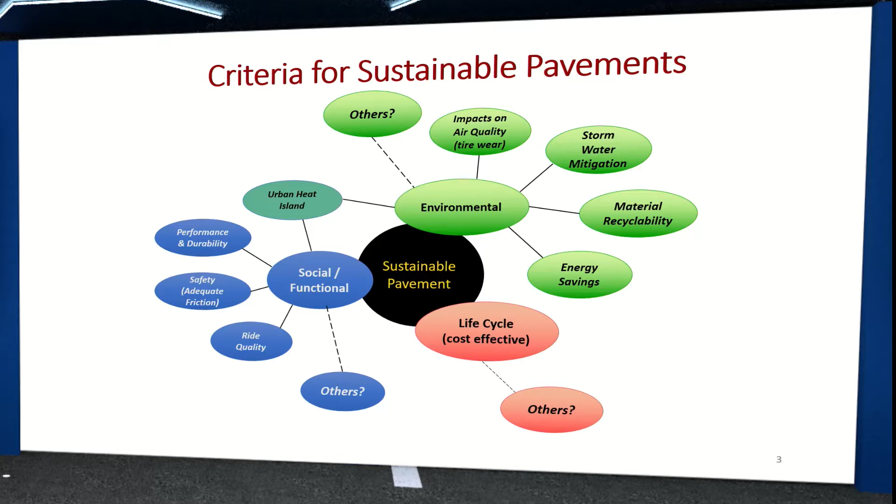We have been studying ways of improving wet method asphalt rubber applications, and we have developed RARx to make roads far more sustainable and far more cost effective, with huge benefits for the users. We have been very conscious in developing sustainable pavements, as all others define them, with great environmental impacts, with great life cycle cost benefits, and with good social and functional properties, namely ride quality, friction and safety.

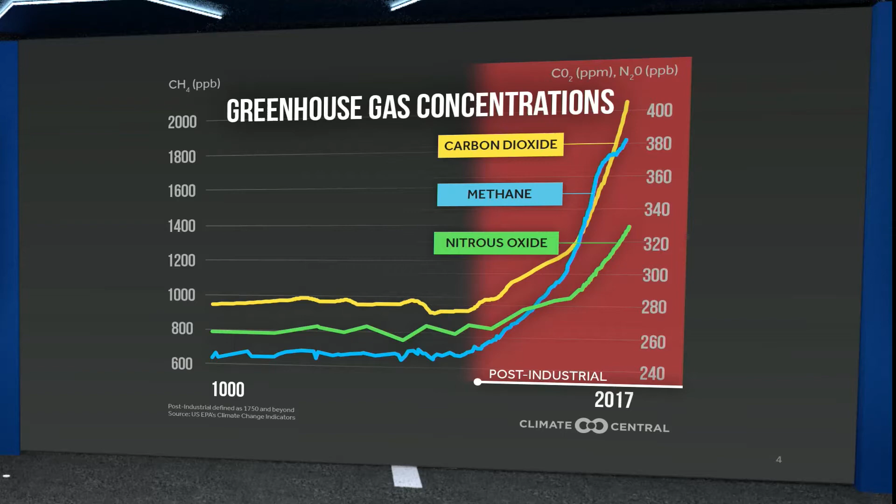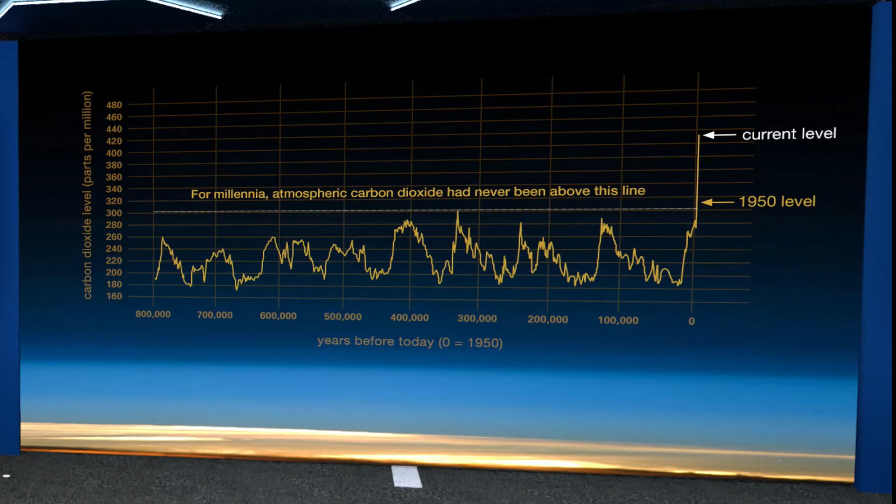This has been achieved in the midst of a reality that we all face, that due to our actions, the greenhouse gas concentrations have been exponentially growing in the post-industrial era. It is that makes us realize that we are in a path that is not sustainable. We are currently at CO2 emissions today that have not existed in the world for at least about 1 million years. We need to control that.

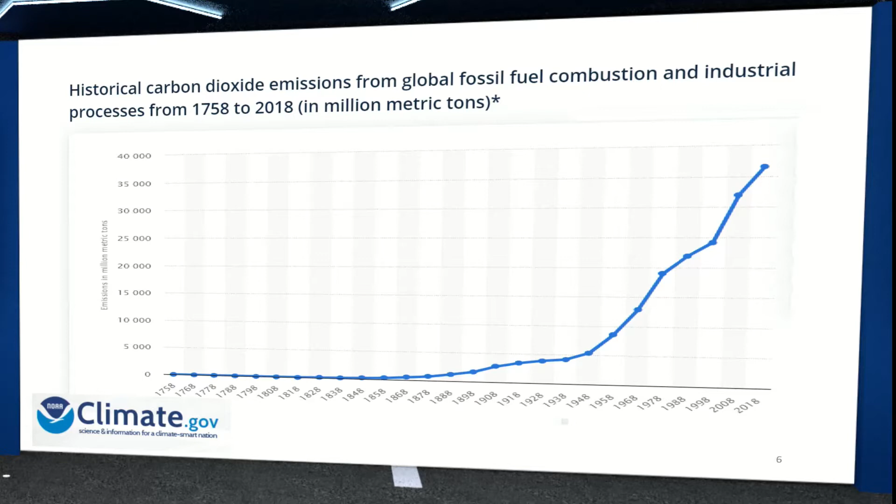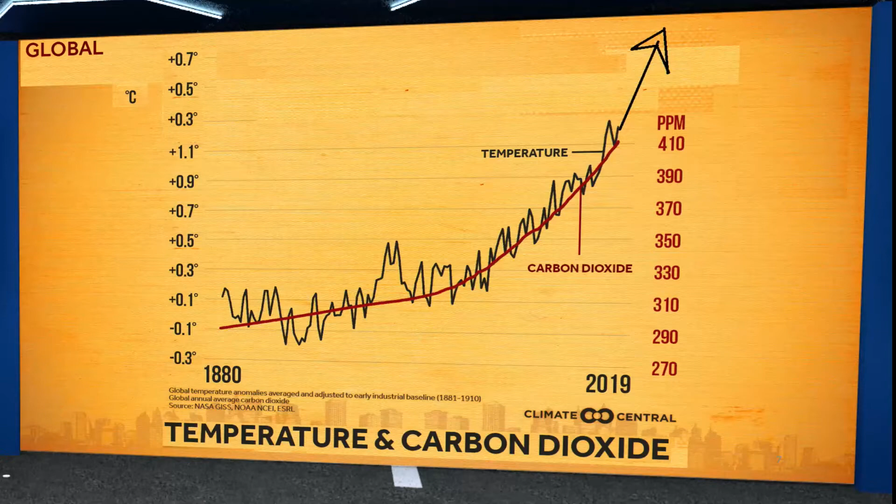We need to realize that these emissions caused by fossil fuel combustion have been exponentially increasing since the time of the post-industrial revolution. We need to control that, because otherwise the temperature in this planet is rising at alarming rates.

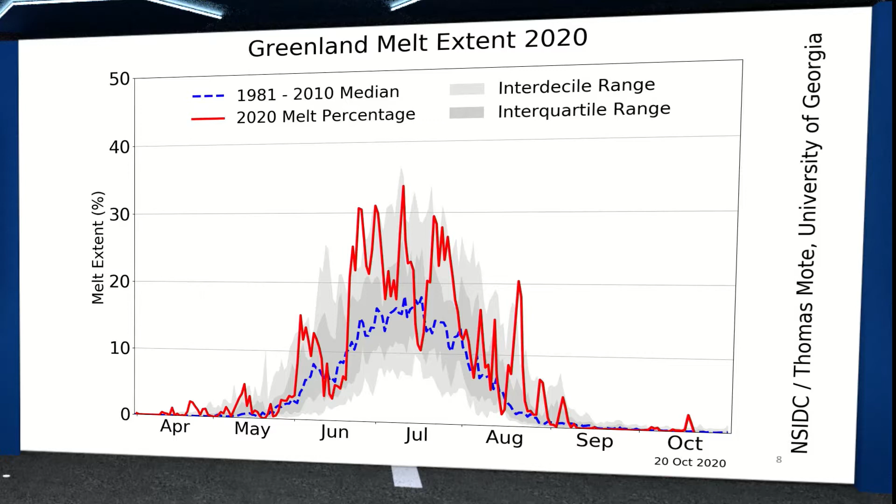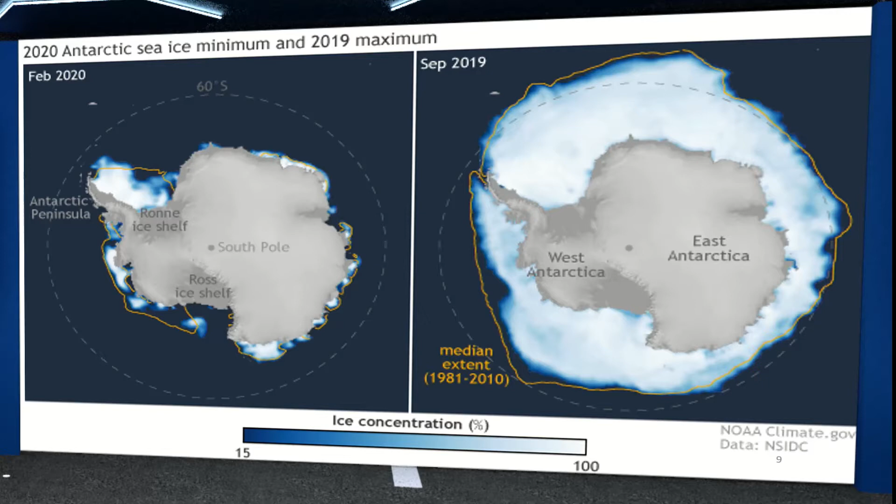We know that this is not going to stop, and the consequences of this global warming are many. One, for instance, is that probably Greenland will melt if we don't do anything. And besides that, we have Antarctica also melting. And this will cause high sea level rises.

This has been widely documented. You may hear that it's controversial, that Antarctica is losing in some parts, gaining in others, but it's clear that the net loss of Antarctica is growing as climate change is progressing.

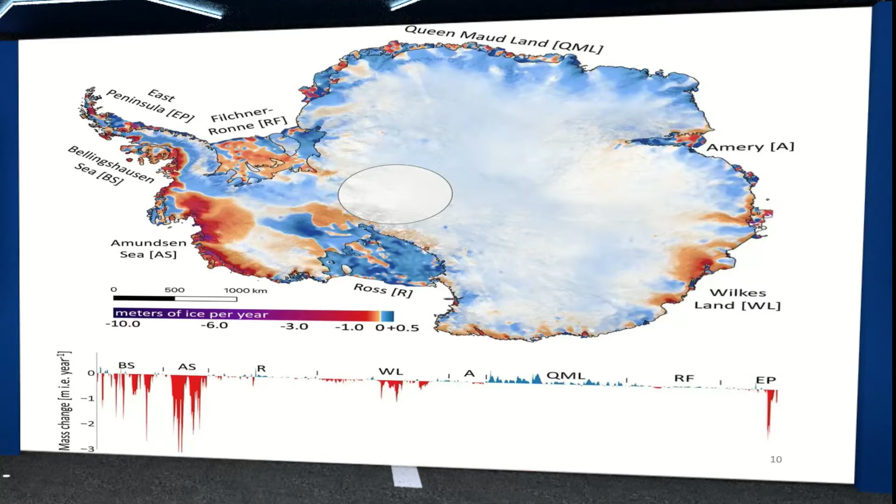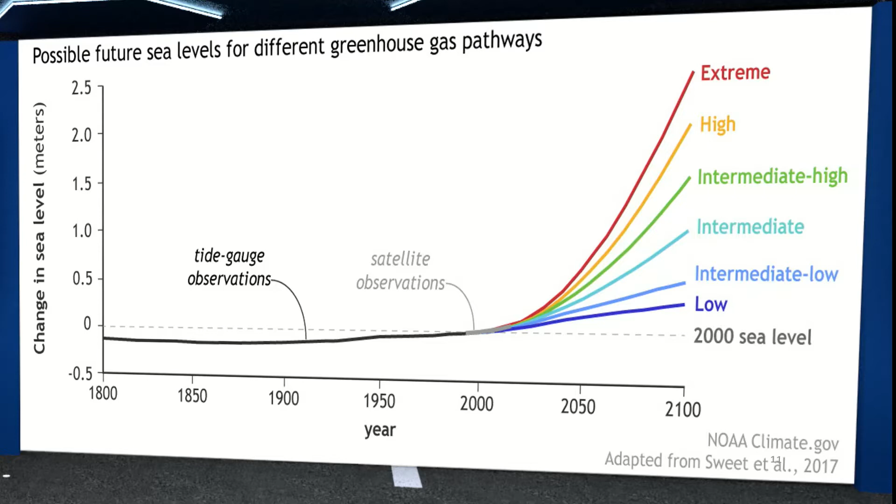We need to control that because the latest prediction indicates that we are now on a path that we will have extreme, too high levels of sea level change. So by the time our kids are in control of the world, we're going to have a planet where the ocean levels are about 1 meter higher than they were in our time, or the time of our fathers. This has caused profound effects.

For instance, in the US, property near the coast in Florida is now starting to lower in value because they know that they're going to lose the houses. We need to realize that this is a global trend and has been predicted. And far more, the predictions have been corrected up to now.

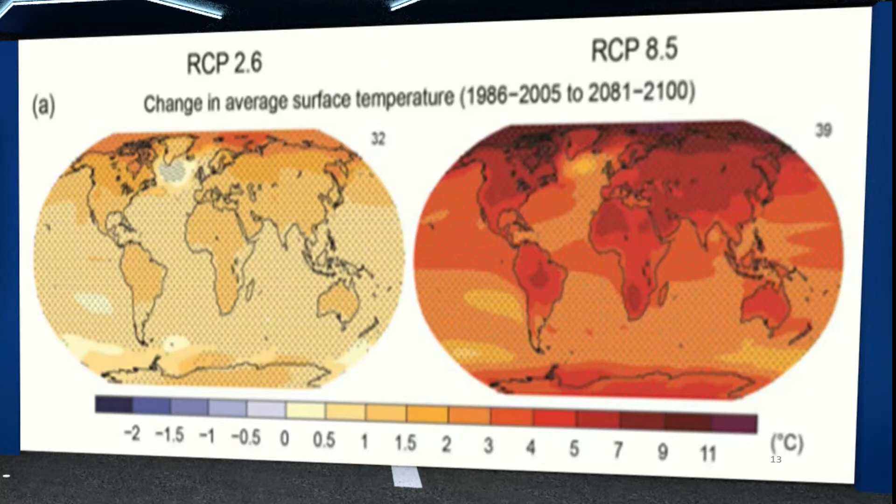You can see in Mexico that you're going to have 6 to 7 degrees on average more. And you can see many parts of the world going to be tremendously impacted. And you can see that this is already happening. You can see that since 2012 to 2016, we have seen temperatures rising on the order of 2 degrees.

And I want to point out that the Amazon is going to be so hot that it's very likely to become much drier, and with that, we're going to lose the forest.

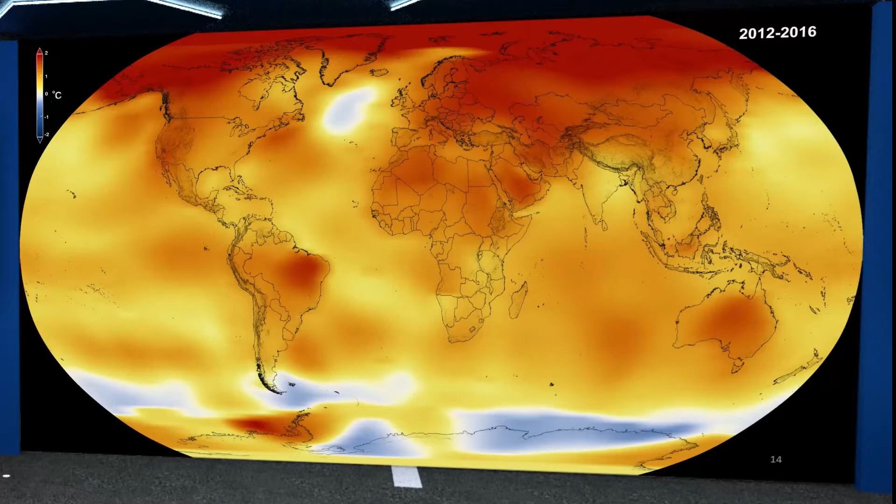This is also evident by this graph showing the level of change in rain seasons. You see Europe is going to be very dry, and so is Australia. So is the Amazon, and you can see Mexico is going to be strongly affected. You're going to have less rainfall and a strong influence on the plants you're going to be growing.

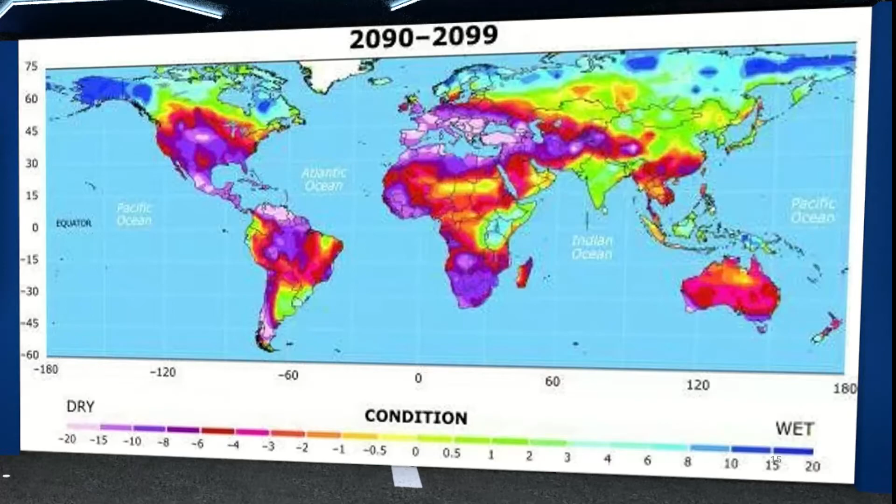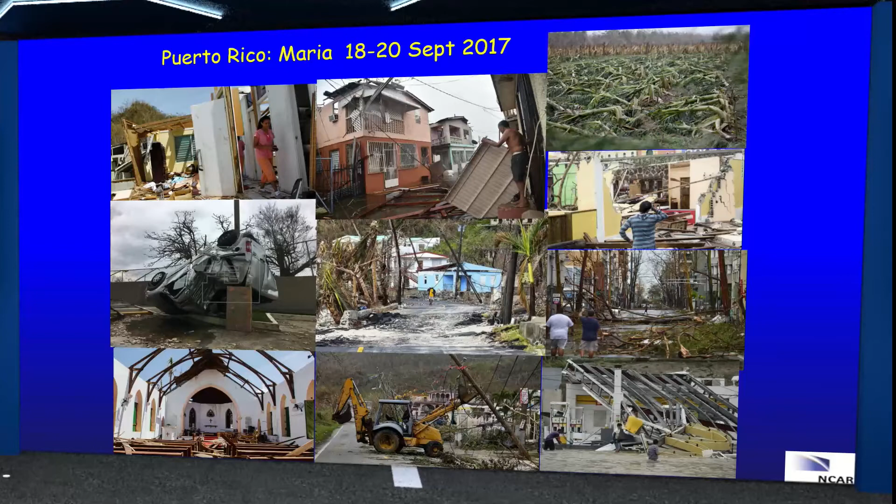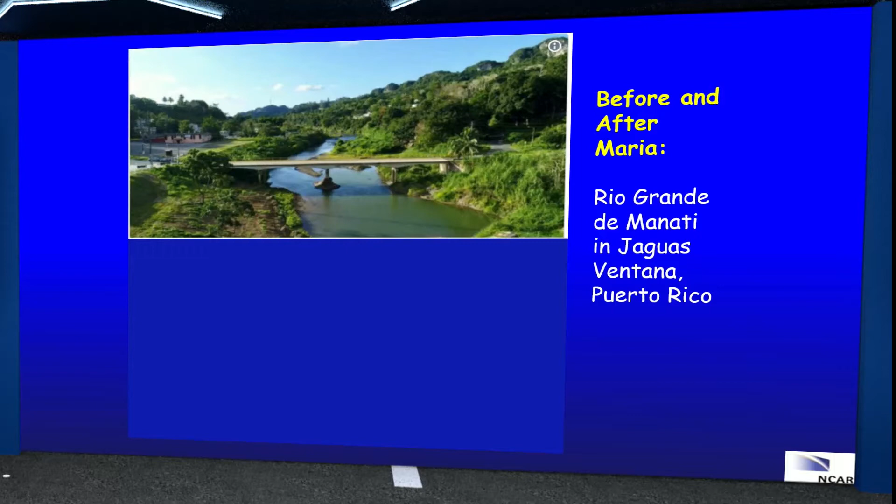Another example of the global destruction occurring is Puerto Rico, Hurricane Maria in 2017. The devastation was great, and you can see this very nice bridge was totally destroyed. If that bridge was done with asphalt, with warm mix, do you think we would have saved anything?

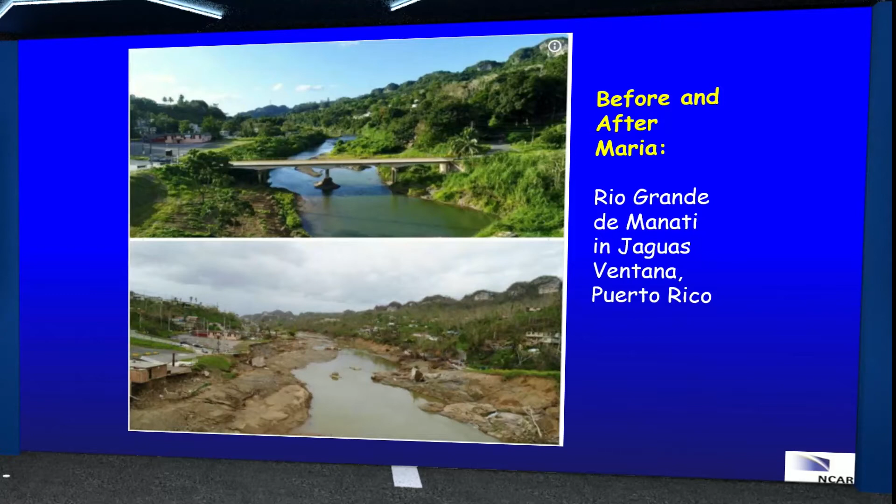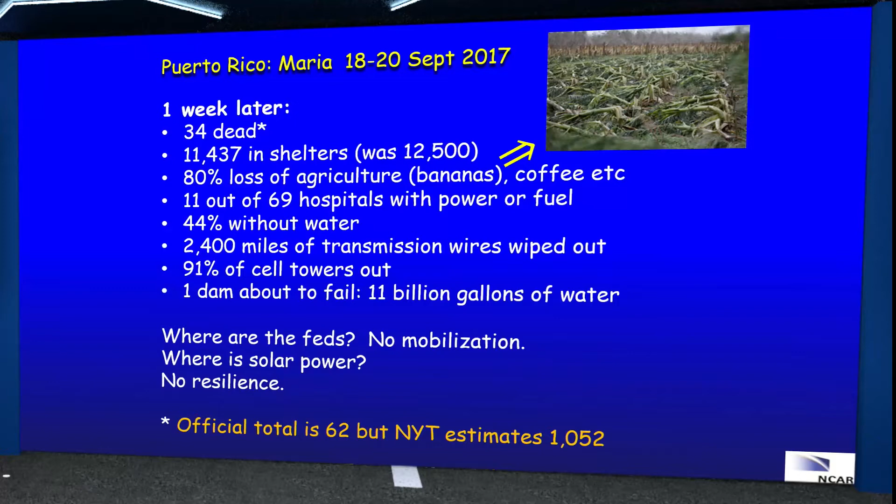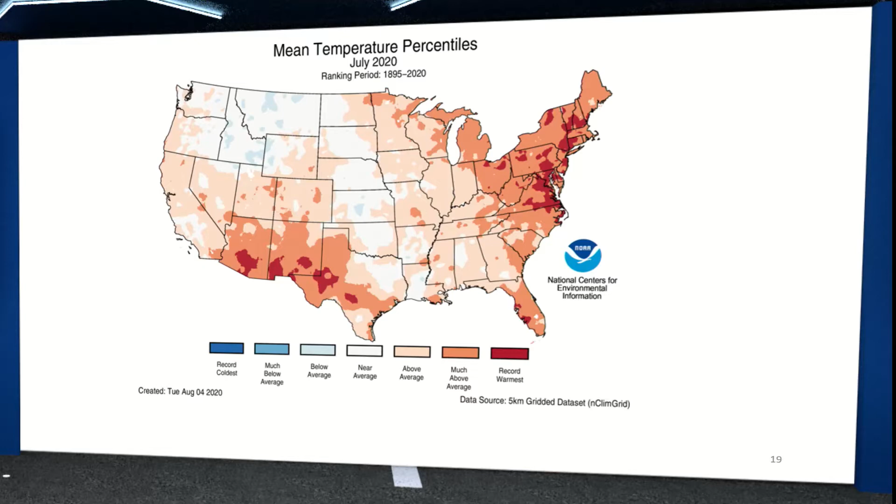With mean temperatures increasing, we had records this year in July 2020, and we have record droughts in the US. This is happening now. The consequences are to be paid now and more in years to come.

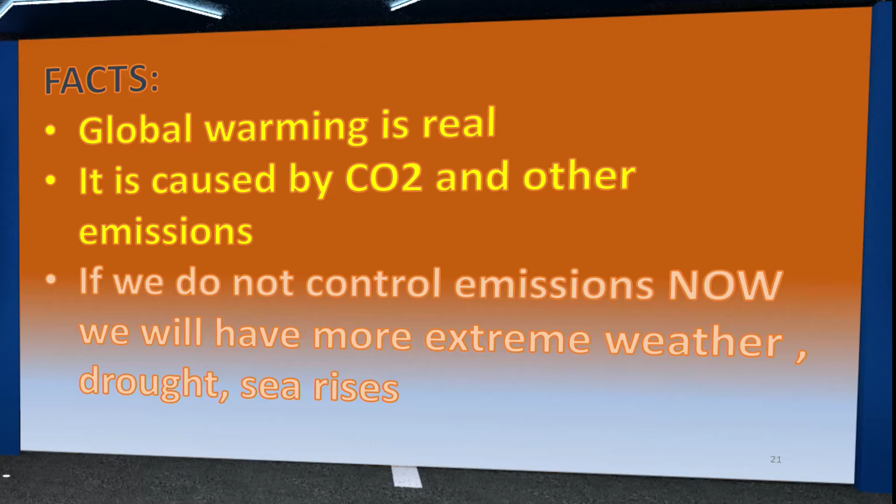Global warming is real. It's caused by CO2 and other emissions. There's nothing to be disputed here. If we don't control emissions now, we will have more extreme weather, drought, and sea level rises. This is a fact, this is not politics, this is not imagination. This is as clear as day and night. So what we have to do is stop and minimize CO2 emissions and others.

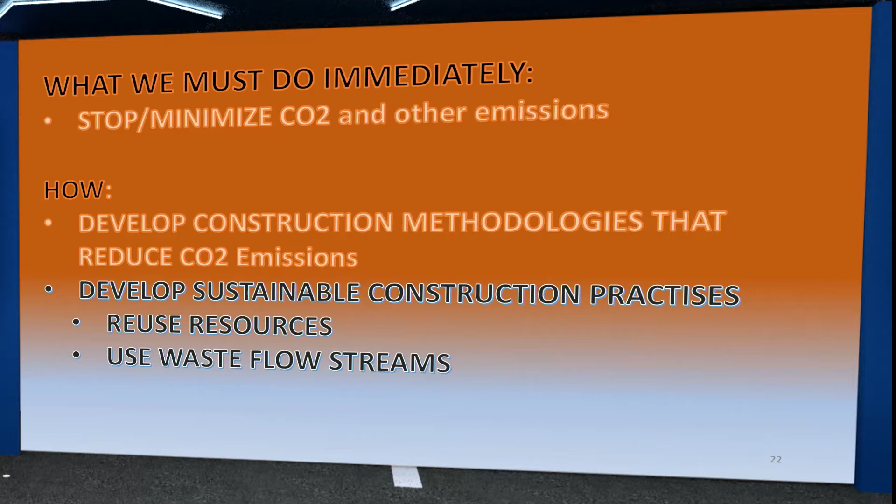We must develop construction methodologies that reduce CO2 emissions, and we have to develop sustainable construction practices, reuse resources, and use waste flow streams. This is not something we have an option about. If we don't do this, the planet will be strongly affected.

This is so important that for the first time, a president -- he may become president by the time you listen to this presentation -- said that we should transition out of the oil industry. It has to be replaced, because if we don't replace oil emissions, we're going to leave this planet in a very bad shape.

So we have to do global warming versus sustainability evaluations. We have to face the reality, we cannot ignore it. Burning fossil fuels is the elephant in the room. It's not tremendously effective if we're just considering the little mouse problem of a little recycling and a little reuse. Either we do it on a big scale, or we're going to suffer dire consequences.

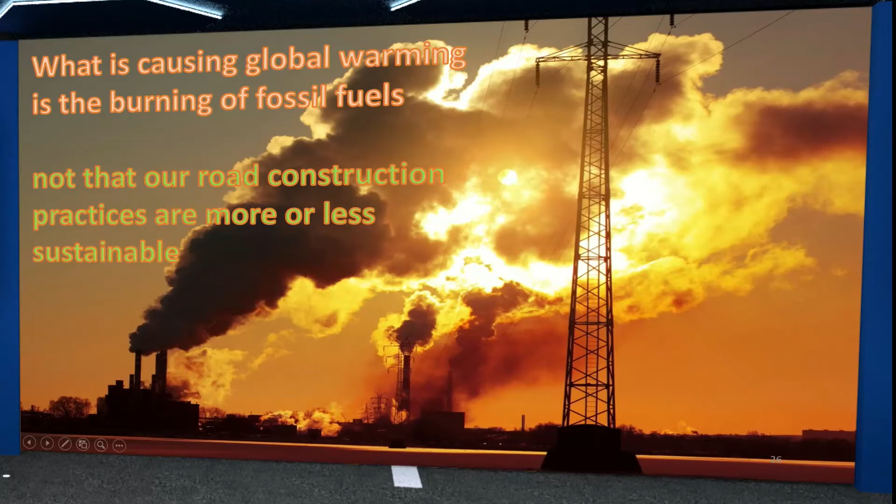So we are burning fossil fuels, and we must stop it. The causes of climate change are not consequences of our direct construction practices -- they are a cause of burning fossil fuels. So if we do the same thing, or better, without burning fossil fuels, we are a winner.

So we have to change. We have to move away from using oil and toward using renewable energy. And with that, I have to tell you something. Right now I'm making this presentation sitting in my office at Consulpav, and I just recently placed solar panels that are now feeding my electrical car, and all the electricity we consume during the day at Consulpav comes from solar panels.

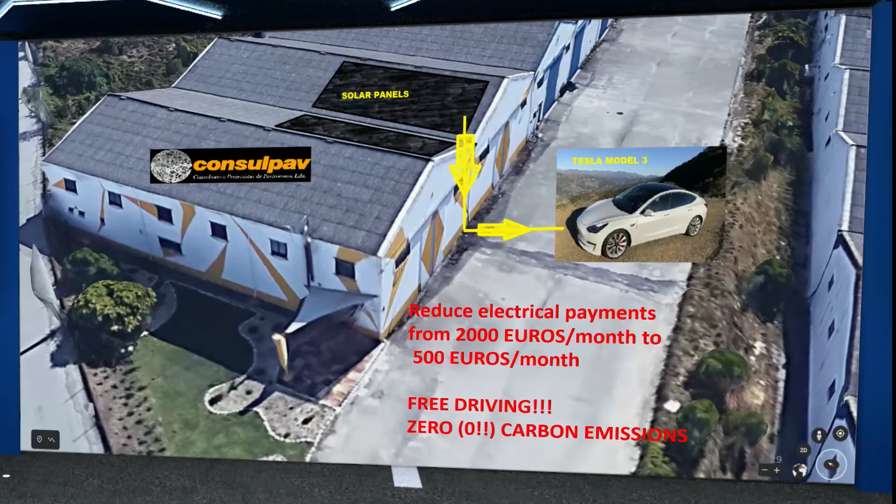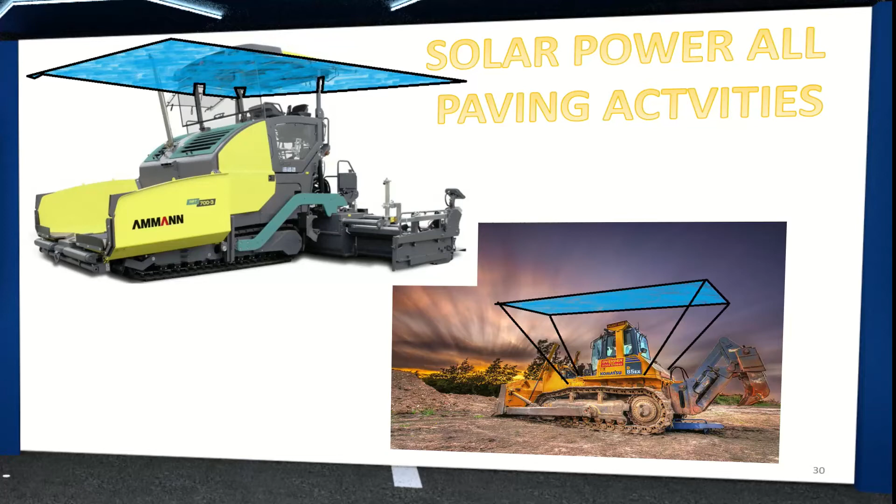So let's think, for the sake of it, about a way of making solar power pavers, solar power earth moving equipment, and solar power plants. So there it is: right there we have become free of oil dependency.

We have unlimited energy, and we create sustainable pavements. But we can go further. We can use the technologies we have to benefit pavements.

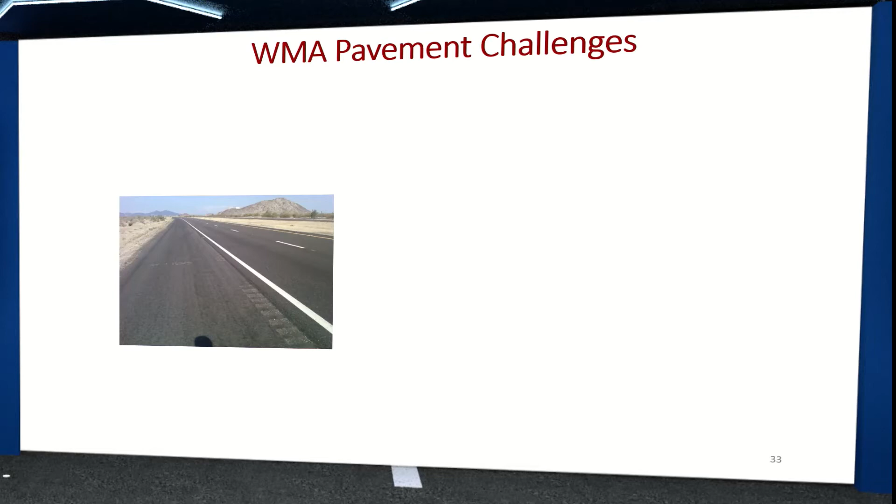Now, many in the US are still forgetting the big picture, considering warm mix technologies and using this technology as a solution for global warming. But we know that warm mix has some problems and it really is not tremendously effective.

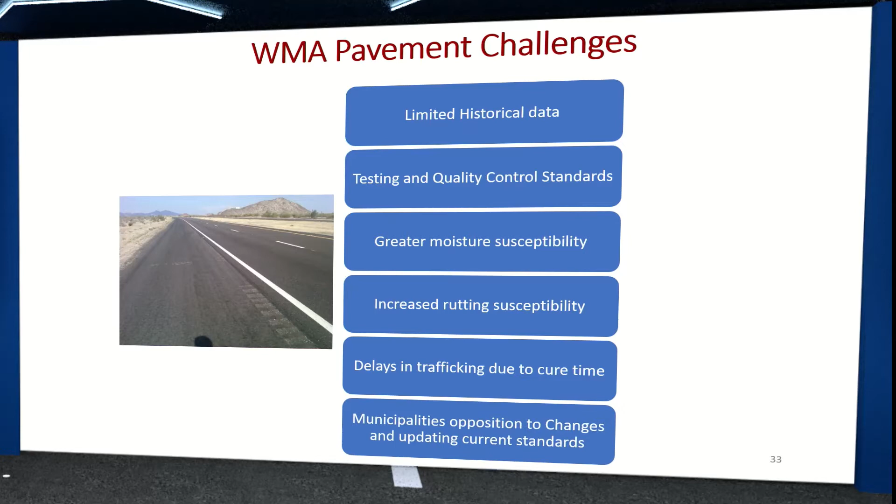So we need to think further. We obviously need to recycle pavements. We need to use as much recycled material as possible. And this is for sure an area where we need to improve testing and quality control standards, because the mixes are to be tested, the materials are to be tested with these new materials.

But now the benefit of it is that we have performance-based specifications. We have performance-based tests. Presumably, we are supposed to make mixes, test those mixes, and understand how they're going to perform in the field. So let's use the materials, see how they perform, and use those that perform well.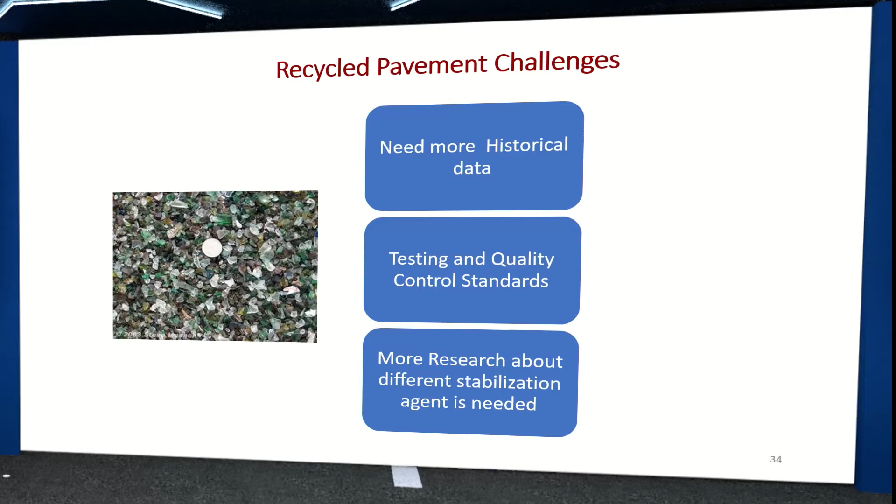Now, as we wait for all these performance evaluations, we have a technology we can use today that has been demonstrated over the last 50 years to be excellent. Asphalt rubber is very strong as a sustainable solution. We have, as you can see, many documented benefits of using asphalt rubber.

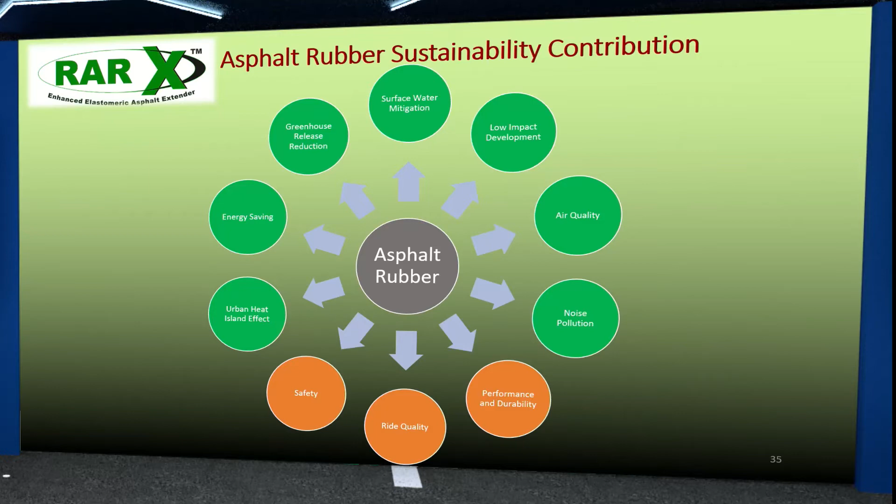It's not a new thing, it's not an invention, it is a fact. It's been very well documented, to the point that in California, all the surface mixes pretty much only use asphalt rubber. So if they benefit, we can too.

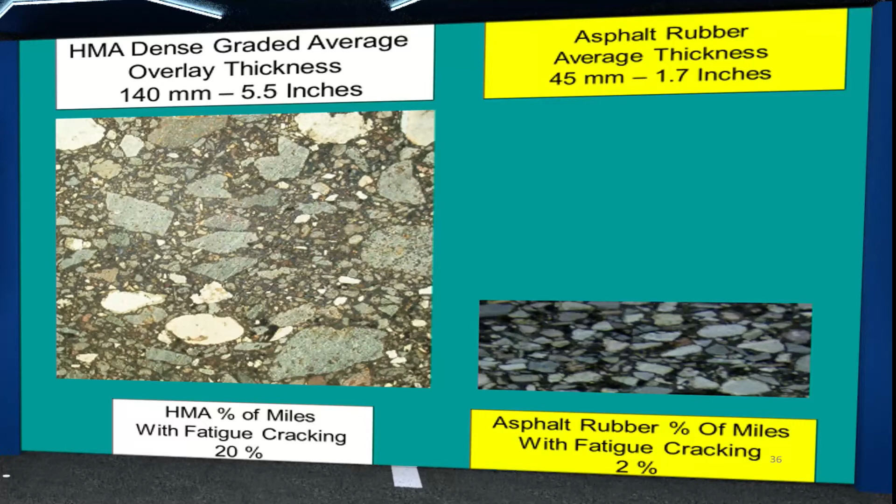In Arizona, they have demonstrated that instead of using 140 millimeter thickness layers, it's equivalent to using 45 millimeter thick layers with asphalt rubber. How much CO2 are we saving by using one technology versus the other? And this is proven - you don't risk anything by adopting these technologies now. No risk. It's risk-free, it's just benefits.

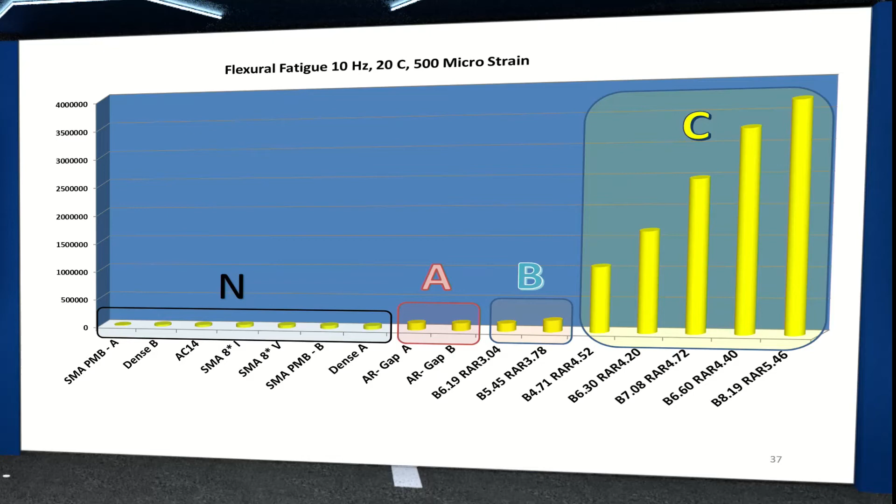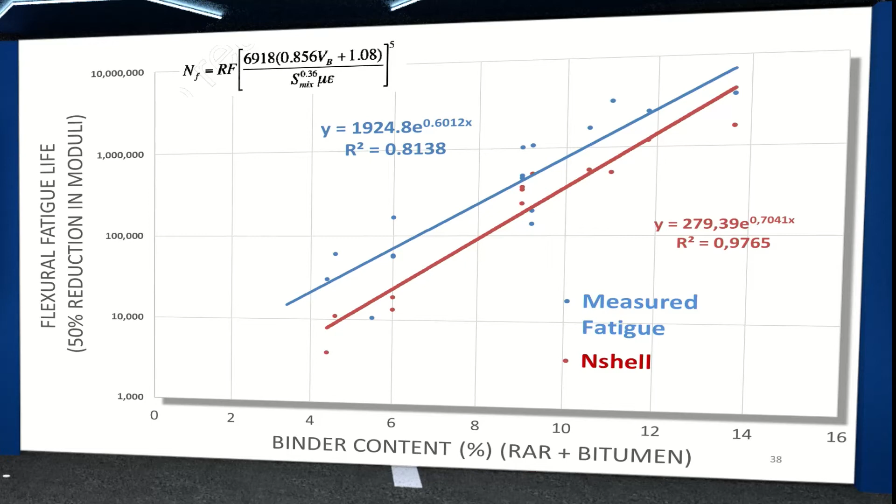So it's clear that the more you put, the better performance you have, and you see that the benefit is exponential. So a little more gives you much better fatigue life. So let's take advantage of it, knowing that the performances are a little shy, they are conservative, and that the fatigue life with RARx and binder together matches perfectly the predictions done using the Shell method.

Pretty much indicating - and this is the amazing part - is that by placing rubber in the pavements, they perform like bitumen. So the mix of bitumen plus rubber plus RARx actually just behaves as bitumen from the point of view of resisting fatigue.

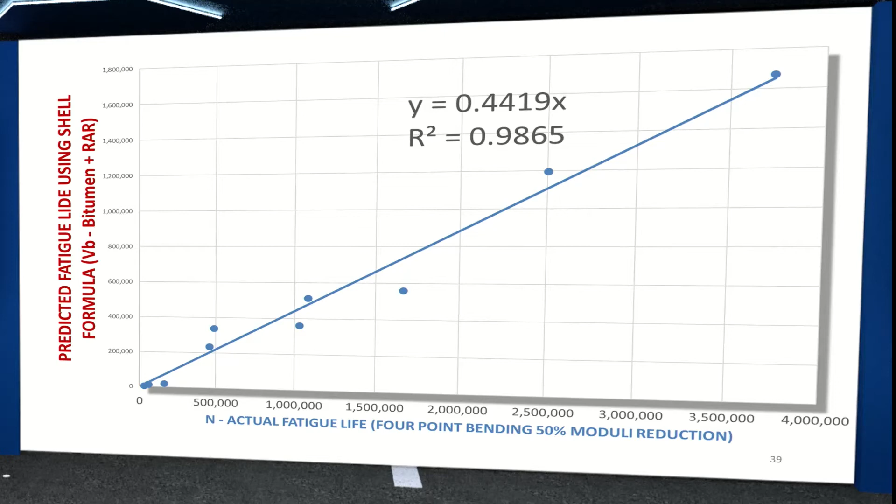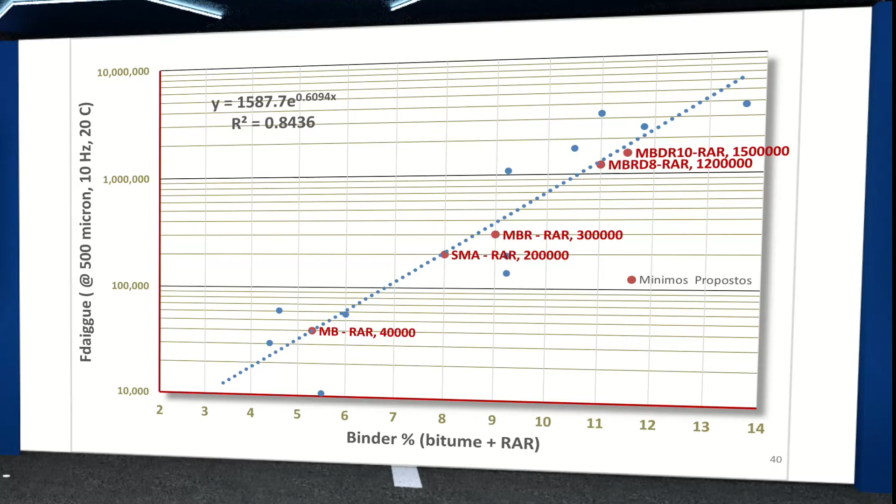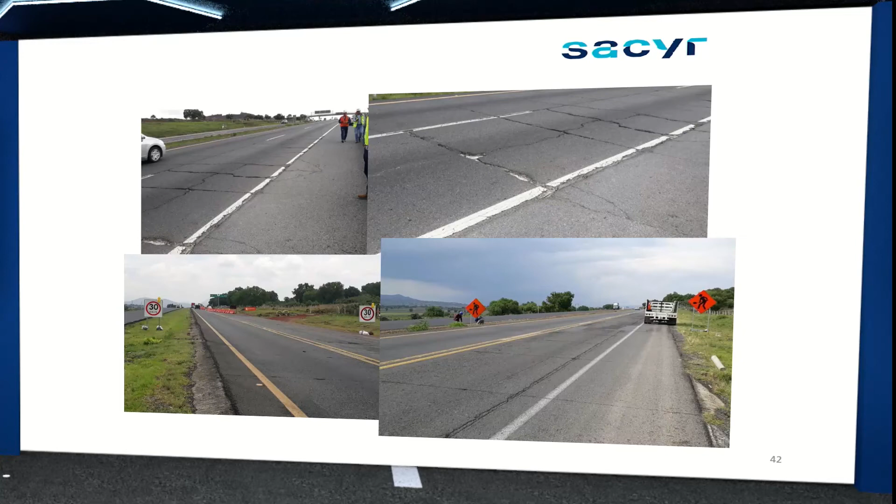This brings us to Mexico again. You can go and see this road. It's on the highway to Tlaxcala, 40 kilometers to the Pyramids, and I was lucky to be involved in proposing these solutions. The pavement was very cracked, like most pavements are as they age, and they tried to define what to do.

Based on the AASHTO ME procedure, it indicated that the pavement needed an 18 centimeter overlay, because they don't have a methodology to take advantage of extremely good performing materials. So based on our experience in the models, we identified that 6 centimeters of the gap grade mix with RARx would be enough to resist the reflective cracking, given that the pavement foundation was good, the slabs are still there, and they will resist the traffic.

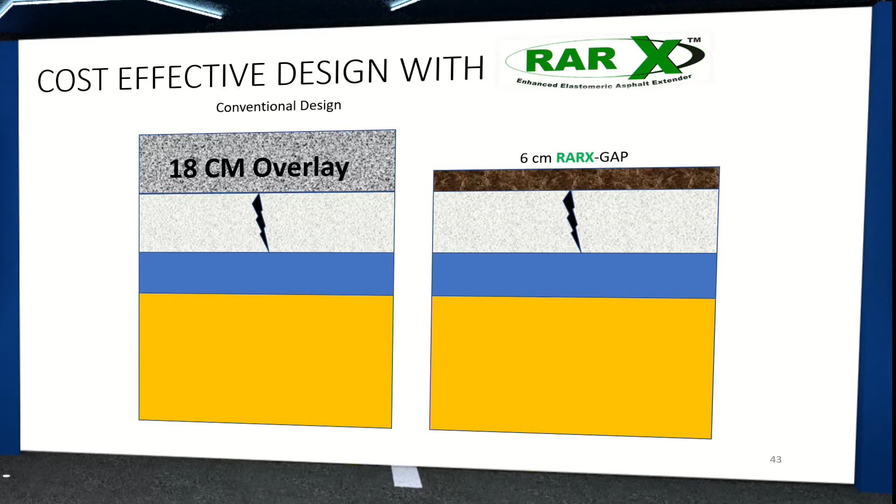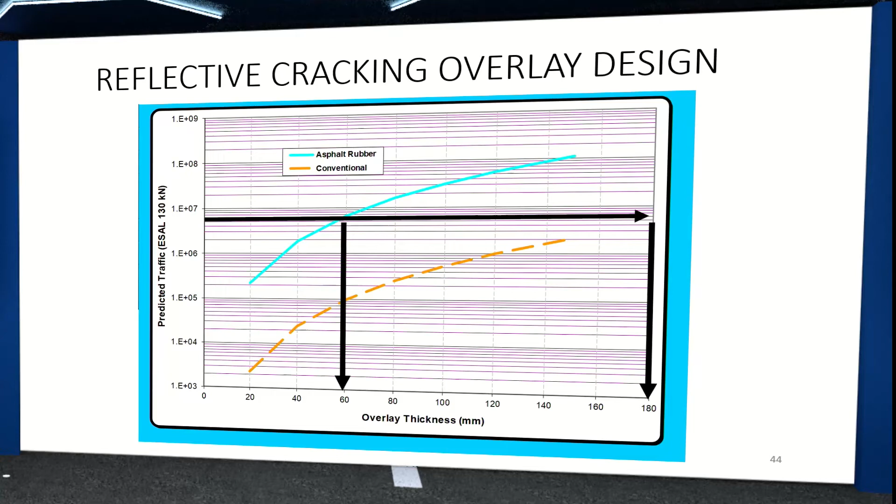We just needed to control the reflective cracking. So this has been based on reflective cracking overlay design. You can see that the blue line indicates less stiffness, much less thickness for the same levels of fatigue.

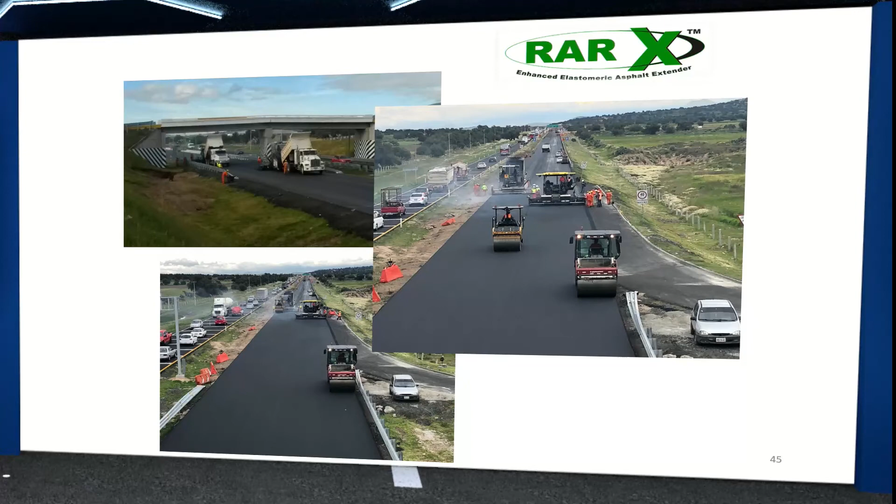We need to realize that this was a successful project, and if anybody doesn't really believe anything I've said up to now, just go drive that road. If you see cracks, I'm wrong. If you don't see cracks, I'm okay.

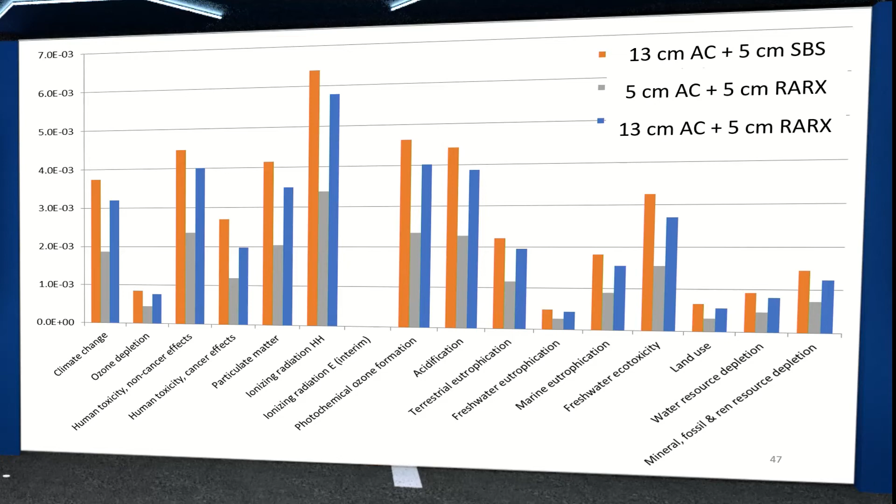One other way of showing that is that we have all these little bars summed up, and you can see that the one in the middle was designed for 5 centimeters conventional mix plus 5 centimeters RARx. Unfortunately, I don't have the one which is just 6 centimeters RARx, which was applied, but you can imagine that it's probably half of what is in that bar there. So it strongly indicates environmental benefits by using this technology.

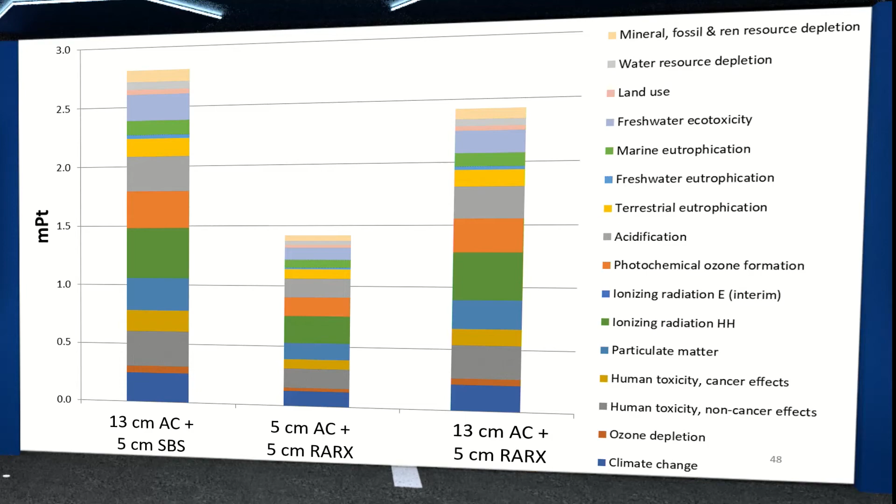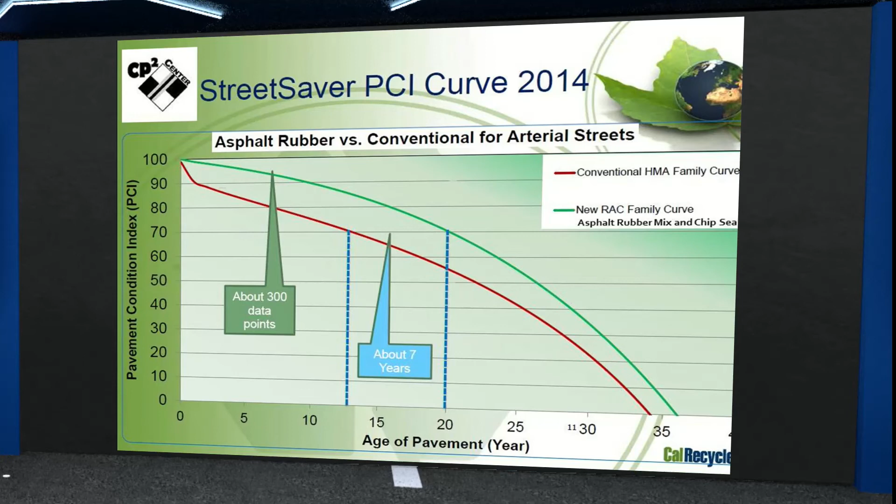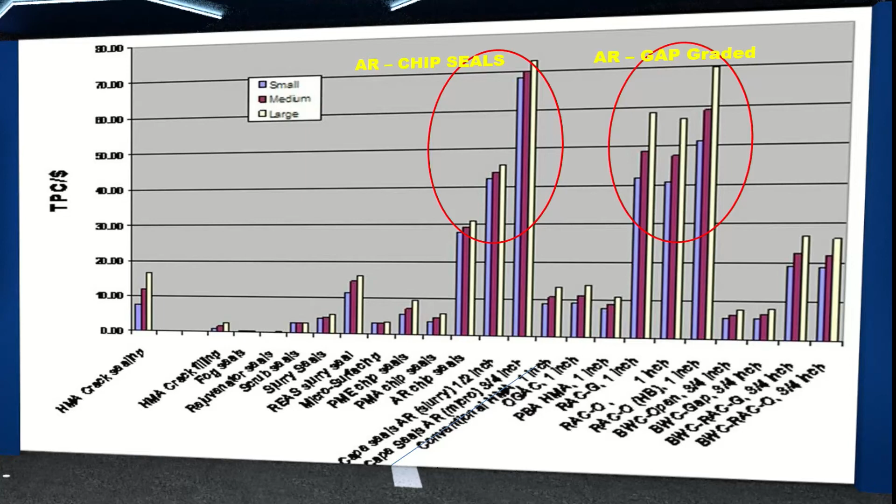This is not something new, as I said. In 2014, CalRecycle in California demonstrated that pavements with rubber last about 7 years more. That's why they now mandate that surface courses in California must use rubber. They are saving money. So let's look at this also from the point of view that chip seals that perform better are those that have rubber, and all the mixes that perform better are those that have rubber.

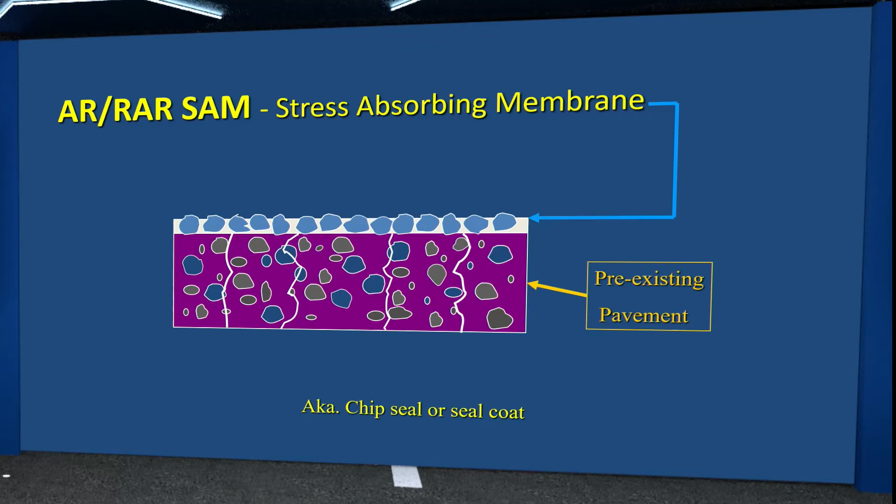So this has been very well documented in the use of stress-absorbing membranes, and also the combination of stress-absorbing membranes with overlays.

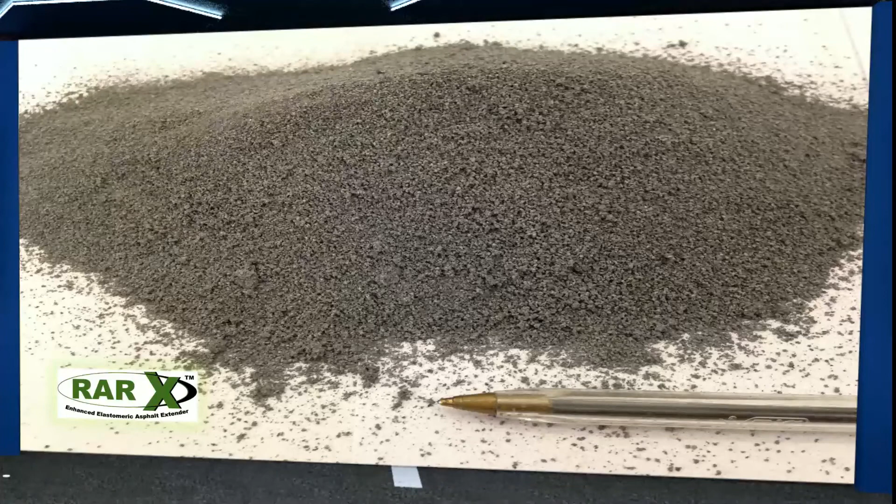So we now come back to just showing you exactly the powder that is pre-cooked, pre-reacted, and activated rubber. It is like a powder. You pretty much replace the filler with this powder to get these super performing mixes.

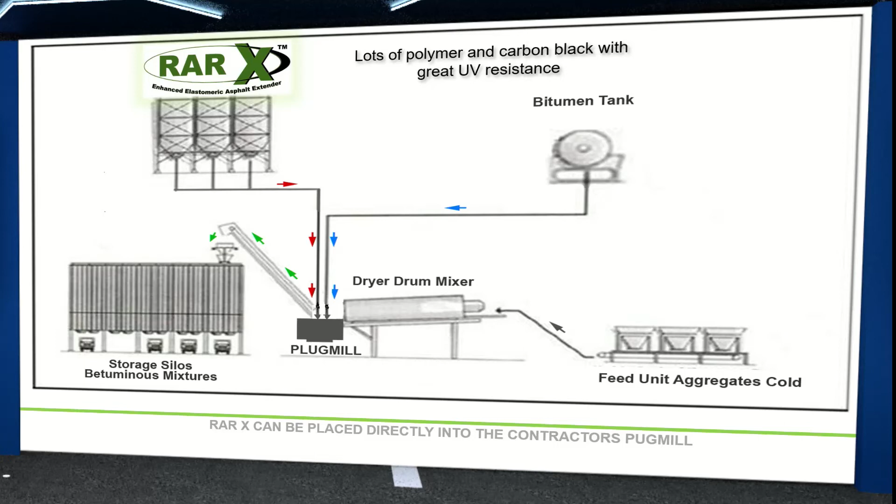And with that, you just have a silo, like any other silo, where you place the powder and then put it directly in the pug mill. No need to react anything on site, no need to spend time. You just use it as a filler, except it's a filler that has these great properties. So no need for asphalt rubber equipment, no need to do any of that wet method procedure, which is very good. Okay, I'm not taking anything away from it, but now it's just simpler. It's just a much easier way to produce super performing mixes.

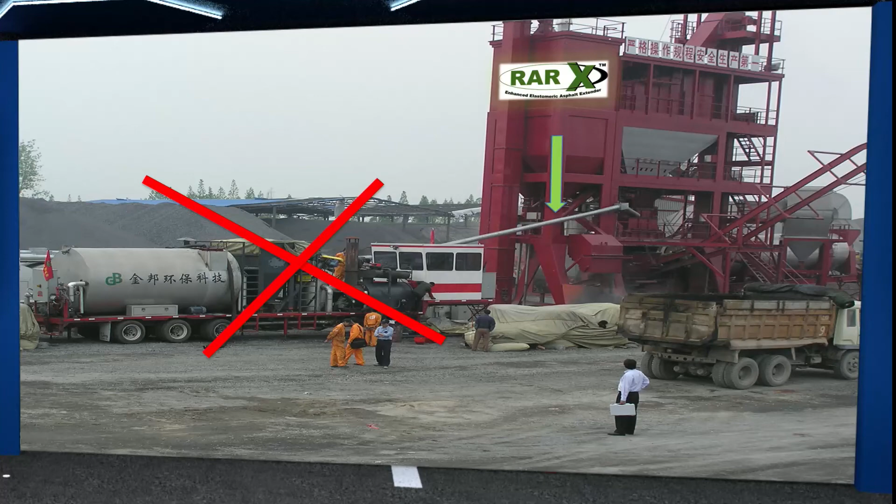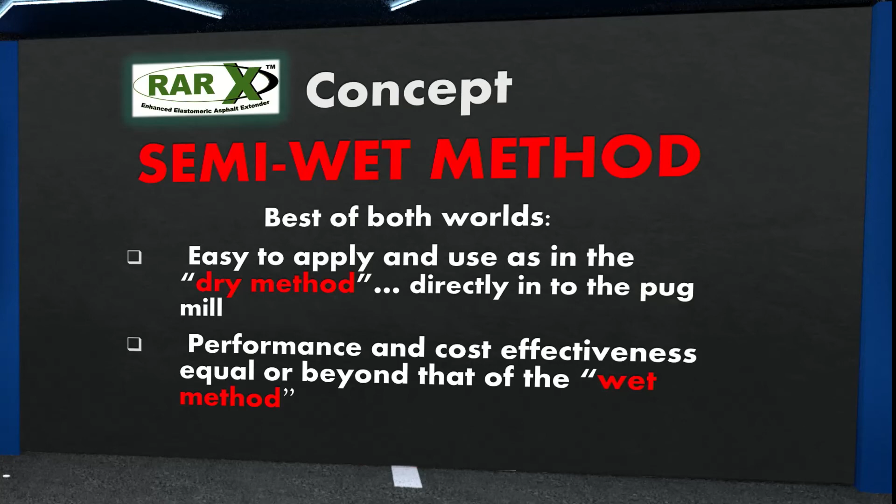So we now have the concept of the semi-wet method, which is the best of both worlds: great properties like the wet method, but applied like the dry method. We have done this in many countries. In Mexico, one, and it is now—this slide is a bit older—we have now many more roads in Spain that have been using this technology.

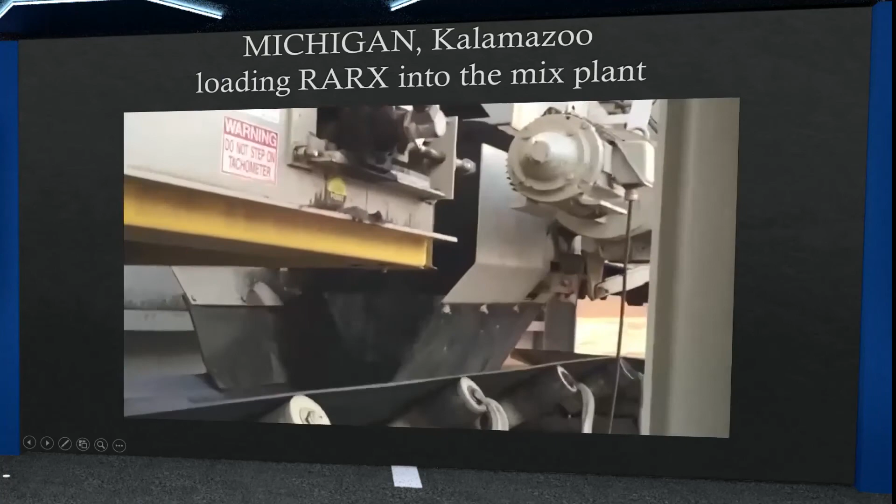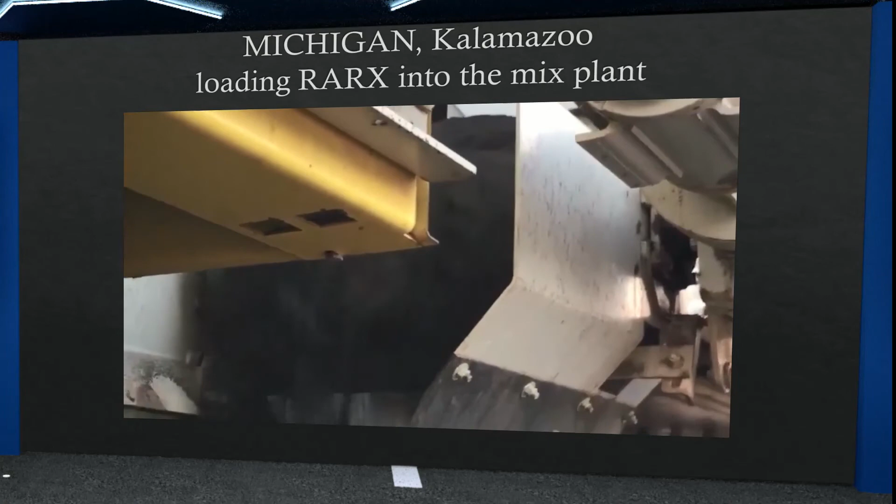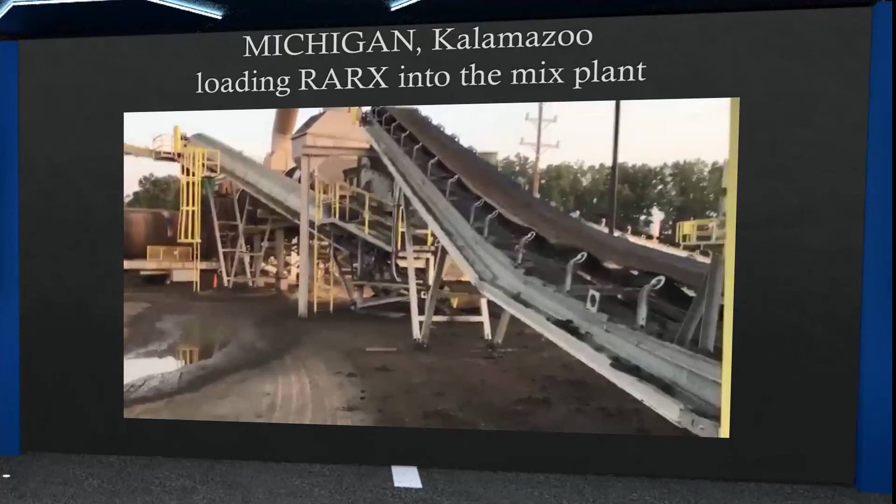So you can see that in Michigan, we applied RARx in a plant. Very easy, it's just a powder that comes from a silo, and it can be mixed as it is here with the RAP mix and goes to the plant. This was the first time it was done in the US and was a great success. There were no complications and we got a great mix. That mix went directly into these big tanks, these big pavers, and is there very successful.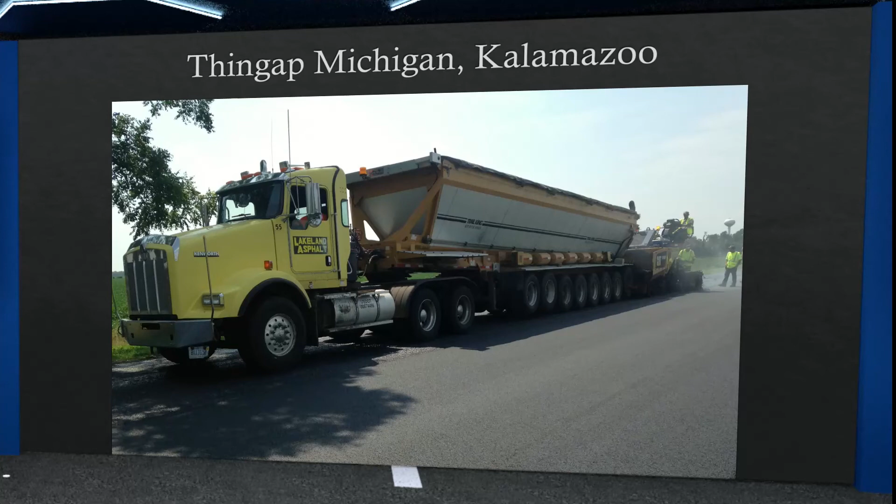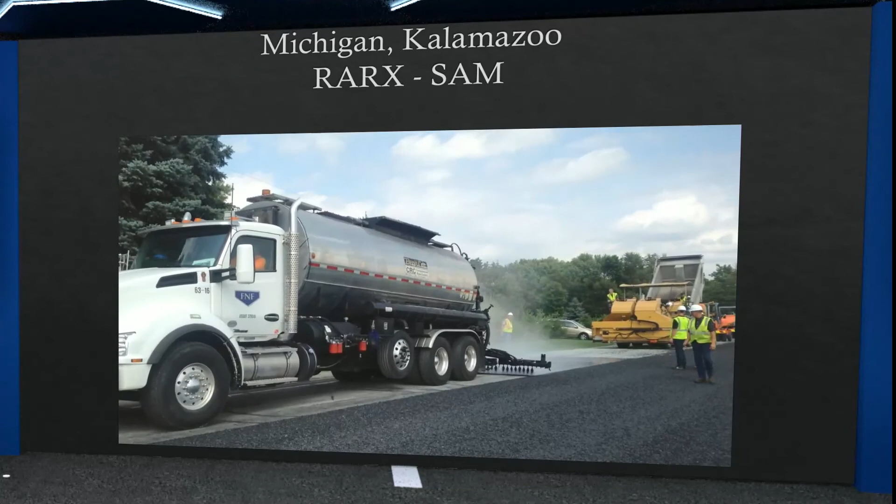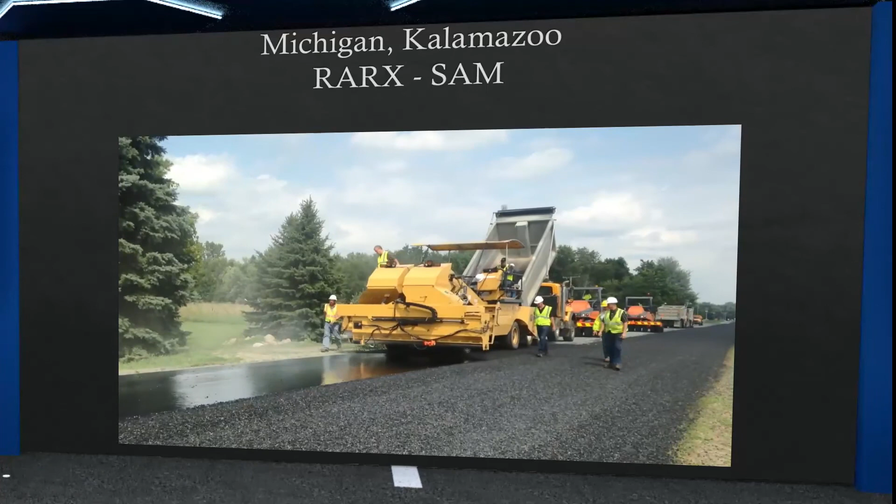We also have applied RARx in the application of this SAMI, in this case it's a SAM, surface treatment, where pre-coated chips are applied over asphalt rubber, which was made inside that tank. This is a very powerful technology. It creates very durable surfaces, very flexible surfaces that will last a long time. I strongly suggest you use this technology in Mexico.

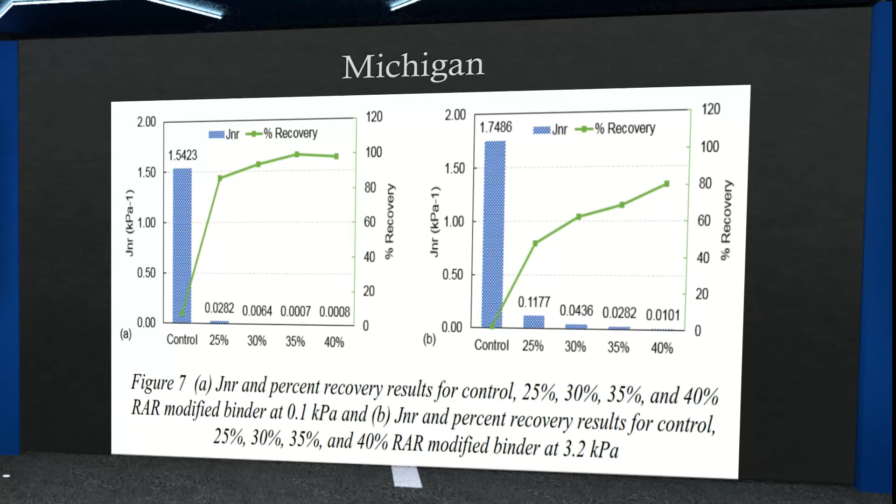And why this works so well, you can see that with the control and the recovery, when you have 35 to 40% RARx, the binder is virtually elastic. You see, percent recovery is close to 100. So for the first time, you have a binder that, when it cools down, is like rubber. So it lasts a long time and it has a great fatigue life.

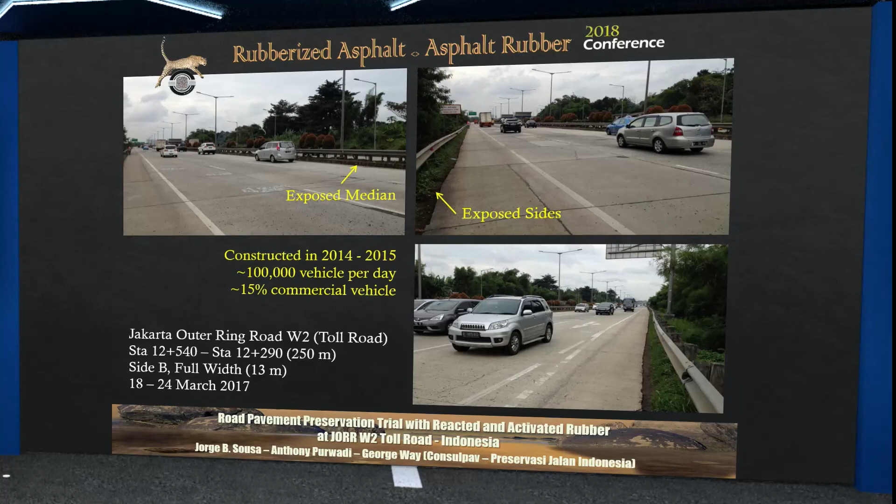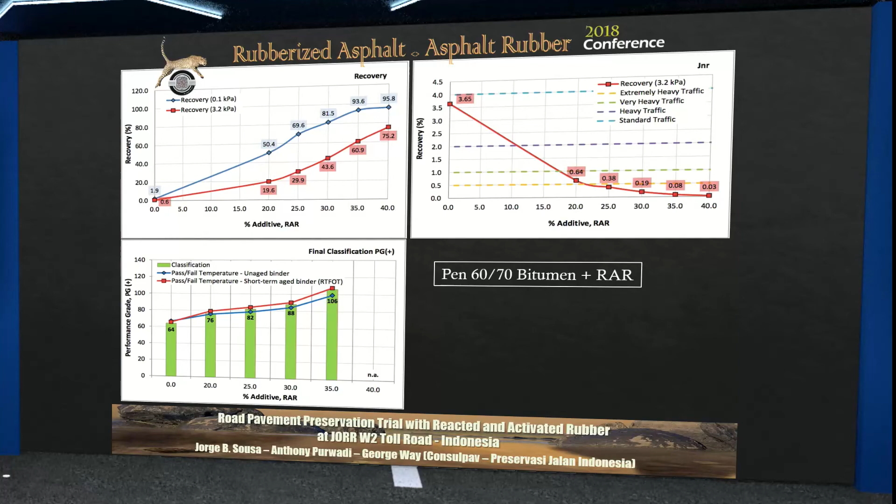This has been applied in Indonesia over slabs, and they lasted a long time because, again, you see that percent recovery is about 93 to 95% with great PG grade of about 100 degrees C. With this performance, it's very easy to understand why they last so long.

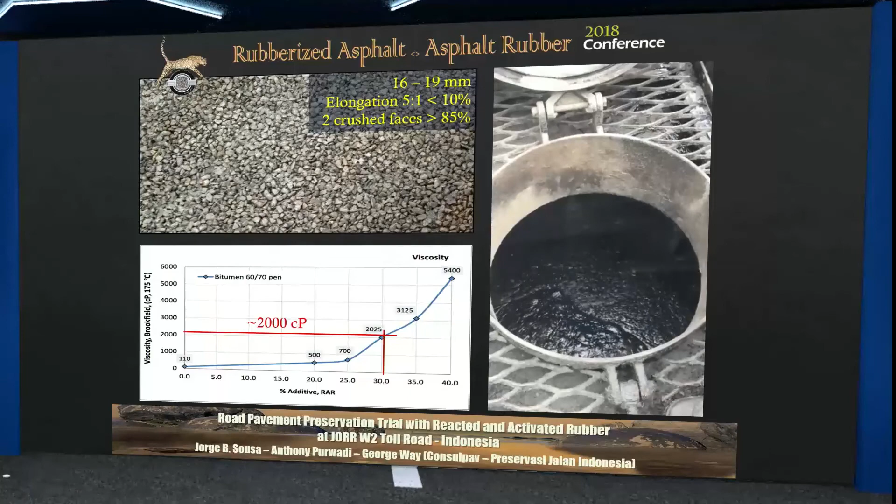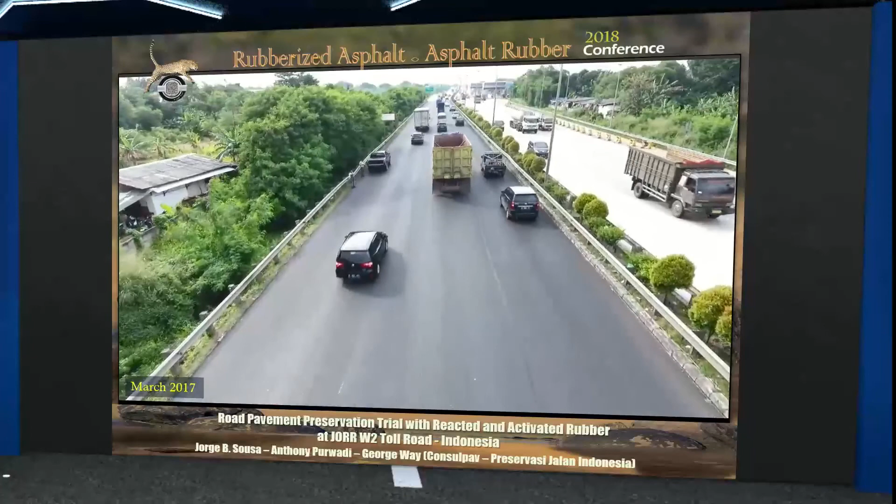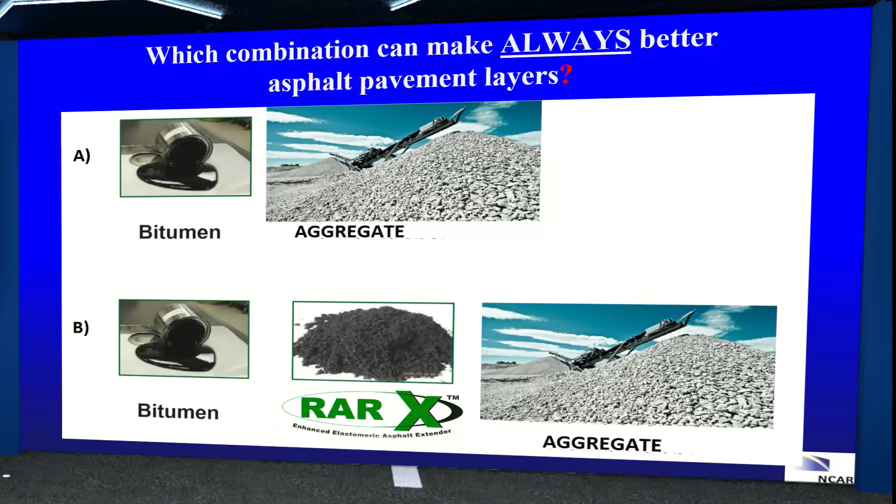It's not that we don't have a possibility to control them. They're very easy to control, and you can see that they have all the procedures to apply a mix like all other ones. So when do you have the best mixes ever? When you have rubber. It's very simple. You can always make better pavements with asphalt with rubber. Now, this is very obvious, but let's now think another way.

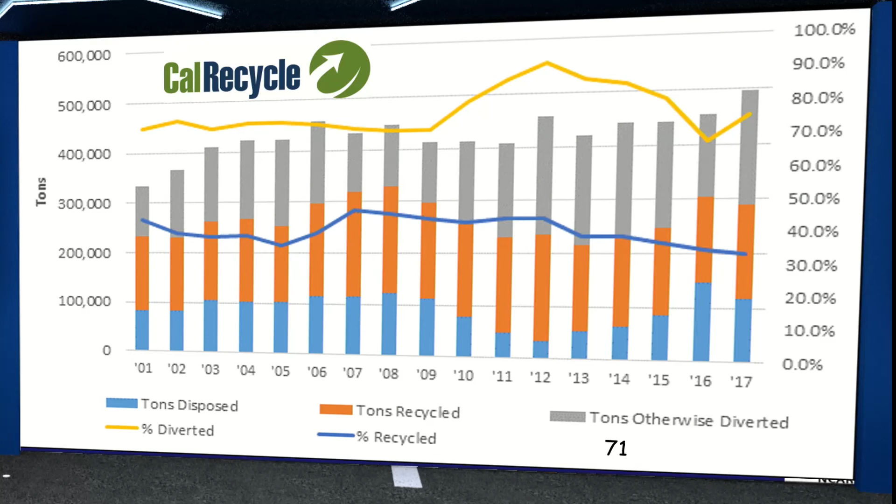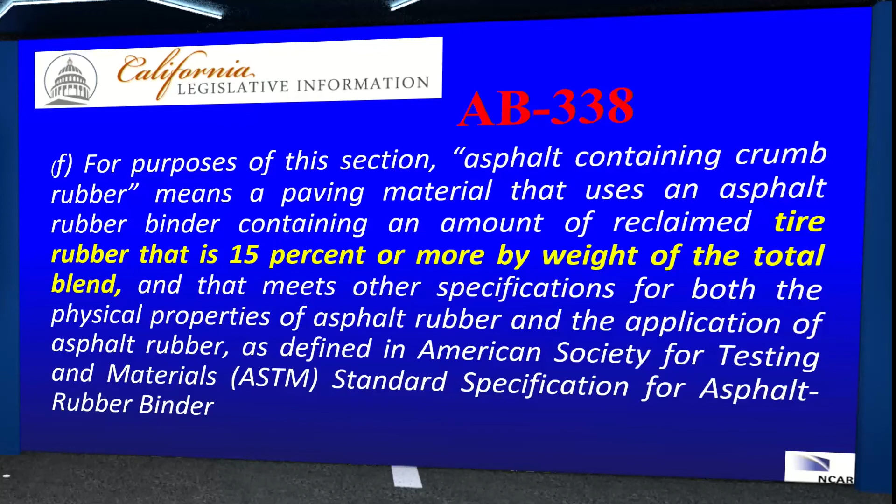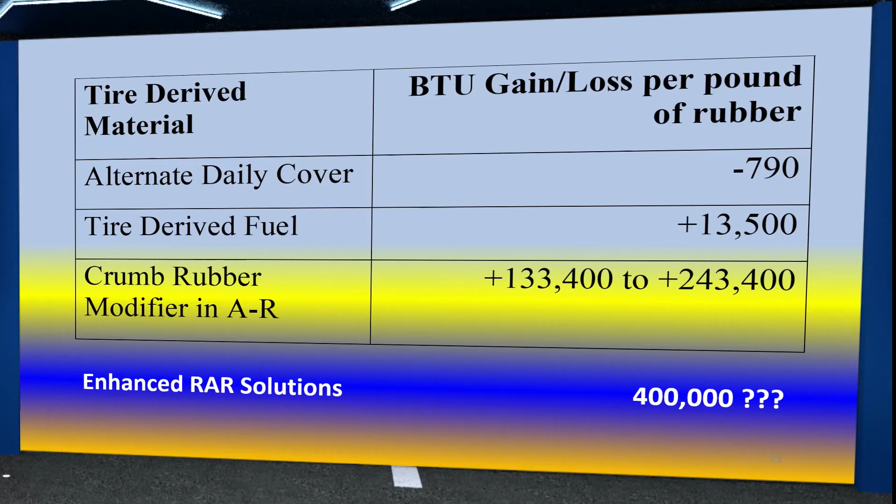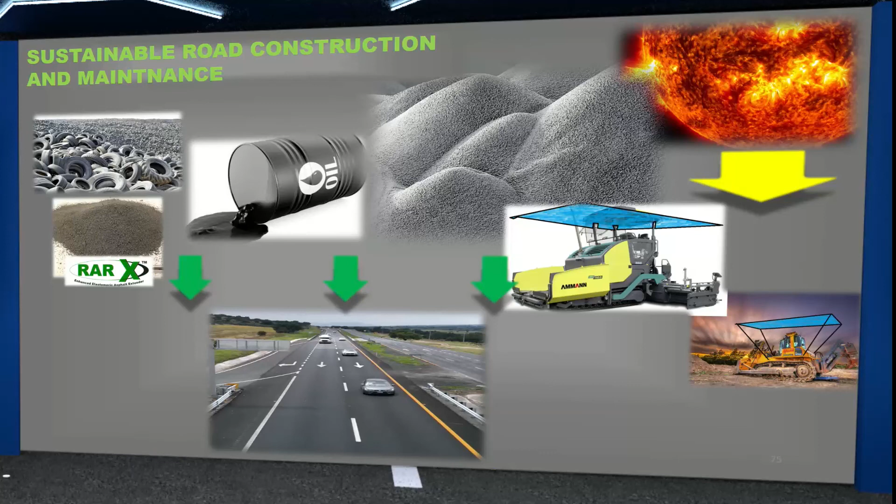So this is very easy. We have sustainable constructions. We have use of rubber, use of oil, use of recycled materials, and in the future, I'm sure we're going to use energy from the sun to make these roads. But from now, you can already make sustainable roads with rubber.

We need to think: if all roads were rehabilitated or constructed with RARx, would Mexico save enough energy to provide electricity to all its inhabitants? How much more sustainable would this be than current practices? How much energy, CO2, would be saved? This is a challenge I leave for you. I have absolute confidence that you have fantastic brains in Mexico that can dig up all this information and determine if indeed RARx is a sustainable road construction and maintenance best practice. Because if we can save this much energy, we are on the road of sustainability. Thank you so much for this opportunity to share these ideas with you.